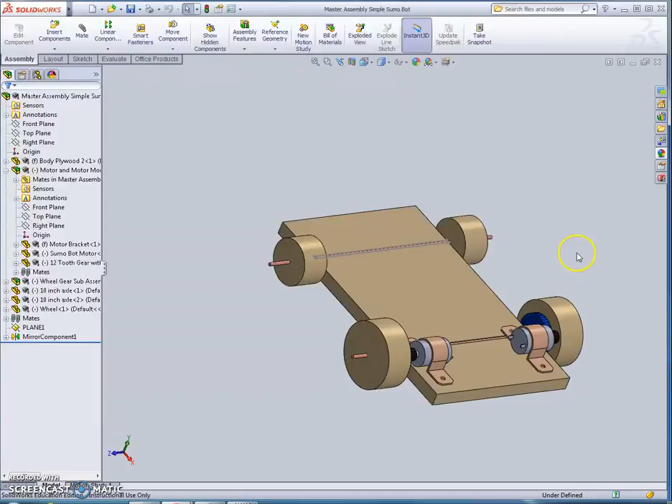Welcome to the SumoBot tutorial number 4. In this tutorial, I'm going to be showing you how to use SolidWorks to make more complex gear trains than I had in tutorial number 3. In the case of tutorial number 3, I showed you a gear train where there was a gear attached directly to a motor that was driving a gear attached directly to a wheel.

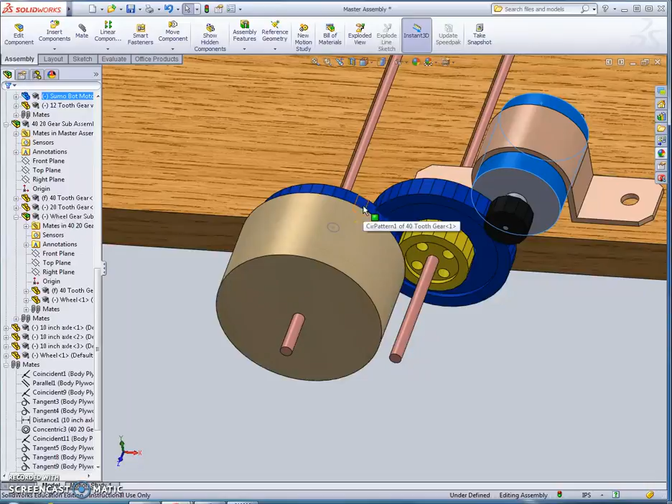In this tutorial, I'm going to be showing you how to create an assembly that has a gear train that looks something like this, where it has an intermediate gear stage. So the black gear is driving the blue gear, the blue and yellow are connected together, the yellow is driving the blue gear that's attached to the wheel. The reason that it's going to be helpful and important for us to use SolidWorks to design this gear train is the spacing between this axle and that axle is crucially important.

If this axle is moved to the left, let's say about 1/16 of an inch, these gears will be too far away from each other and the teeth of the gears will literally miss each other. They won't be aligned to touch and the motor won't be able to make the wheels move. If, on the other hand, this axle is placed to the right too close by about 1/16 of an inch, the gears will be jammed up against each other and they will grind and not really be able to move.

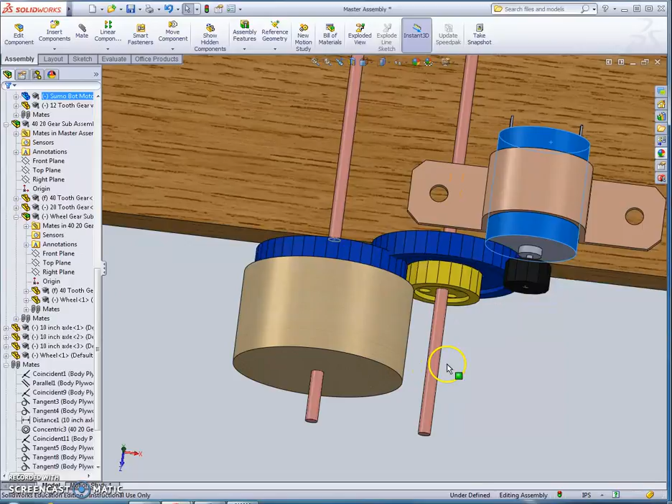So the precise placement and distance between these two axles is crucial, and that's what I'm going to be showing you how to use SolidWorks and the assembly feature in SolidWorks to do. All right, we're going to go back to our master assembly for our simple SumoBot. I'm going to delete a few of the last steps that we did. And actually first I'm going to save this as a new file. I'm going to call this master assembly 2 complex sumo.

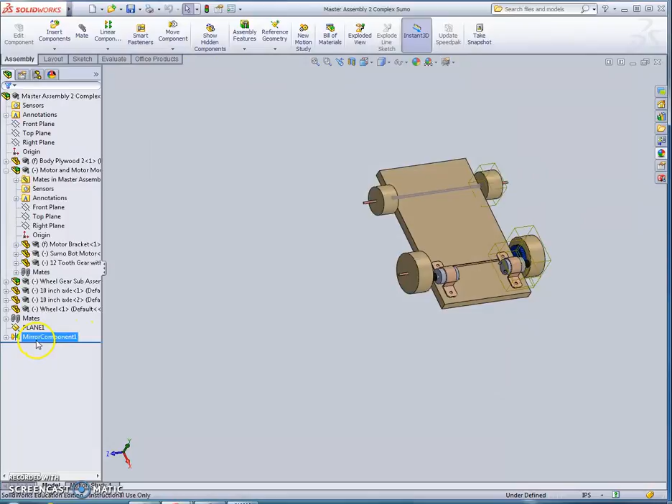Okay, here we go. I'm going to delete some of the last steps. I'm going to delete the mirror component and the plane that we created. And I'm also going to select this wheel and gear subassembly, and I'm going to delete that from our assembly. There we go. So we're kind of starting over with part of the gear train. Let's go back to Insert Components. We're going to find the gear train subassembly that we created earlier. This is in tutorial number 2. I'm going to place that there.

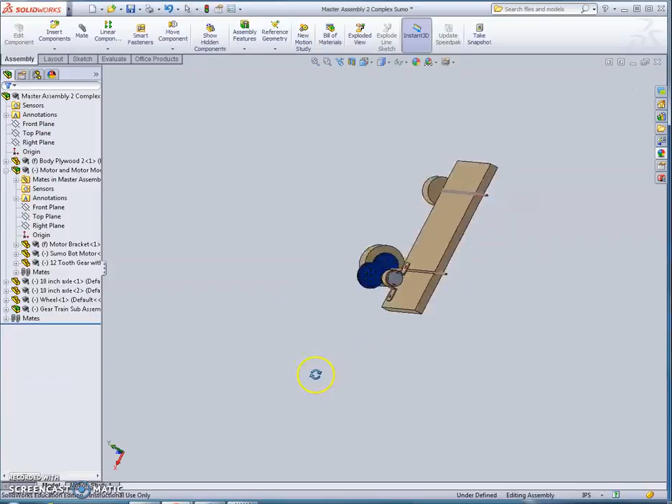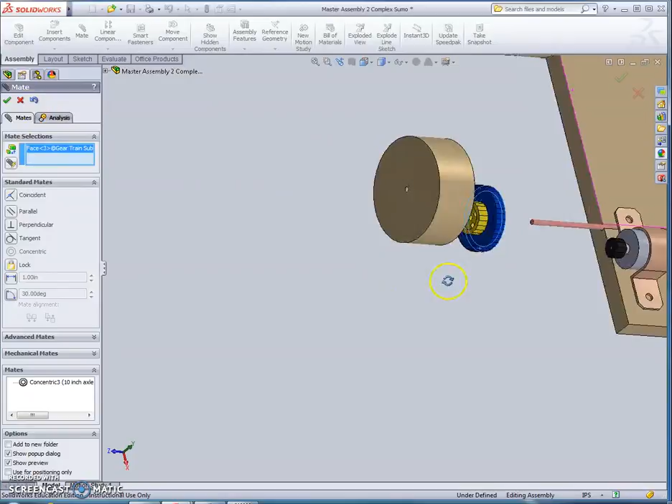And the first thing we're going to do is mate this gear with that axle. So to do that, we're going to select the inside cylinder. We've done this before. Select the cylinder on that axle. Check mark. Then let's also line this up with the face. So that and that. And I'm going to space them out by about 1/8 of an inch, so it's not quite rubbing, but it's very close.

One thing that I did intentionally: you'll notice that this wheel is actually too large to fit where this axle is going to go. That's something that, if there's time at the end of the video, I'll show you how to change. But actually, let's change that right now. If we select that part and edit component, we can go back to the original component and make changes in it. So that part itself is highlighted here. It was called the 2.5-inch wheel. I just click the plus so we can see all the different steps that were made.

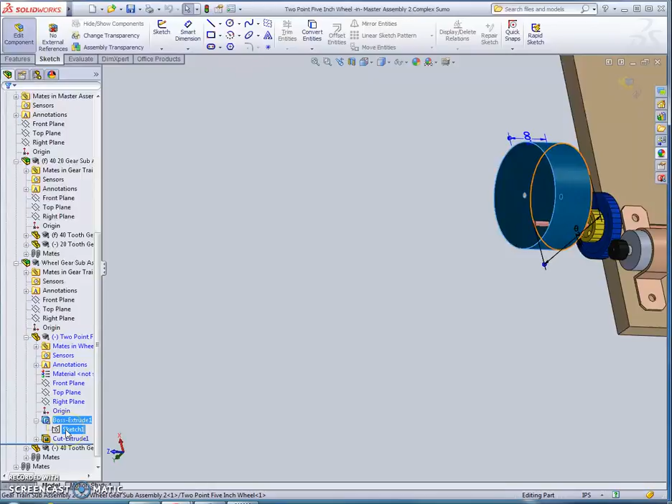That circle, to make that smaller, I need to change the sketch. So click plus next to boss extrude. Click the icon for the sketch and then edit sketch. And then you see where it says 2.5 inches there. I'm going to change that to 1.5 inches. How about 1.75 inches instead? Check mark.

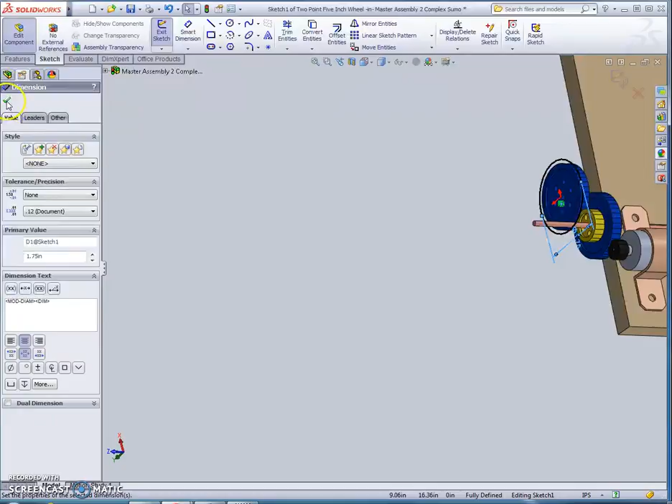Exit sketch. I'm done editing the component, and you can see that in our assembly I made changes to that wheel. That wheel is now also changed in its original part file.

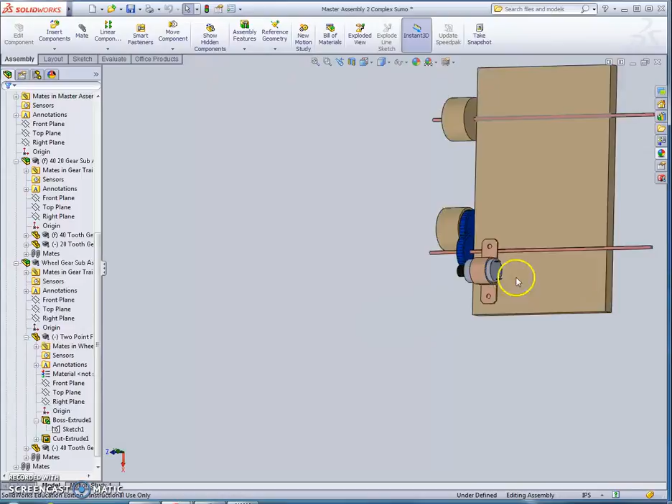Okay, so the next thing that I'm going to show you how to do: we've already created one dado cut, and the placement of that dado cut was not very important because we can really just move this motor around to make it mesh with that gear. Kind of in real life, that's how you'll physically do it. The dado cuts, however, are things that once you cut them, you can't move, and so they need to be placed precisely. And so here's how we're going to use SolidWorks to do that.

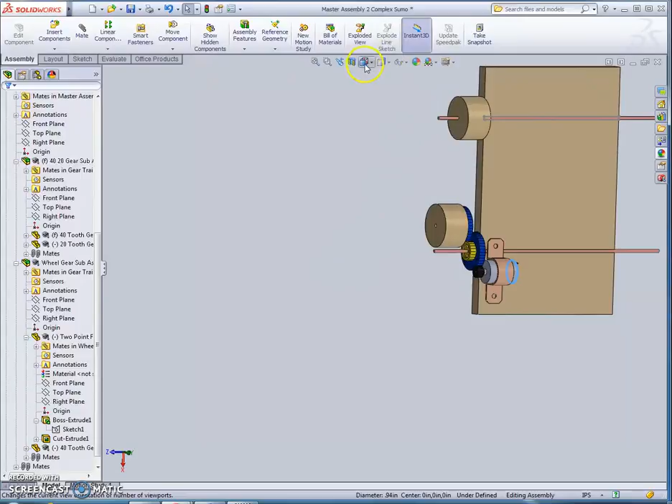I'm going to first look from the side view, try to be lining things up this way, and that wheel is really going to be in the way of what I'm doing. So I'm going to click on the wheel, then go over to where it is in the Feature Manager design tree, and I'm going to click Hide Components. So it's going to look like it's not there, it's invisible. I can make that come back if I want again.

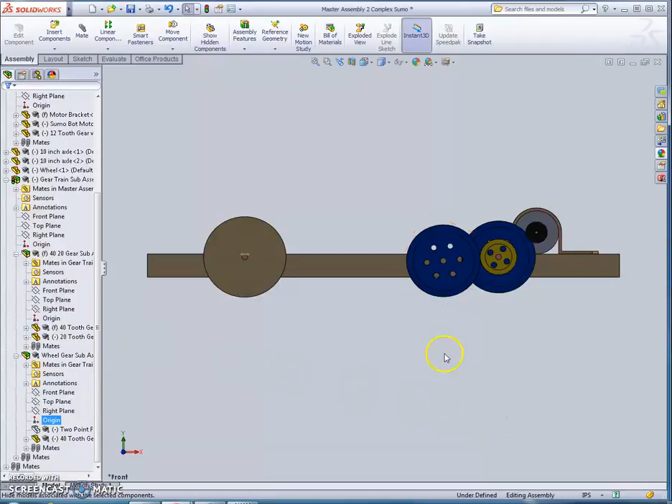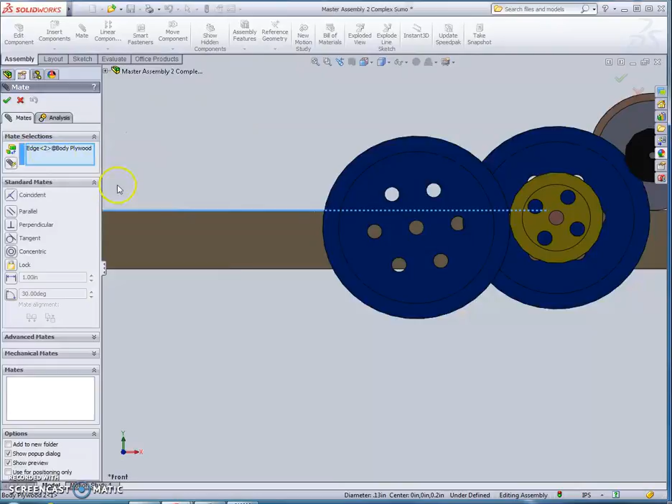Okay, next, I'm going to mate this gear to the top of this plane. And so here's the idea. The dado cut that we're going to be cutting is going to be on the top of that board. And so we want this circle, there we go, to be lined up with that edge. All right, and it's having trouble with that. Instead of the edge of the circle, let me do the cylinder part of the circle. And I'm going to line it up with the top face.

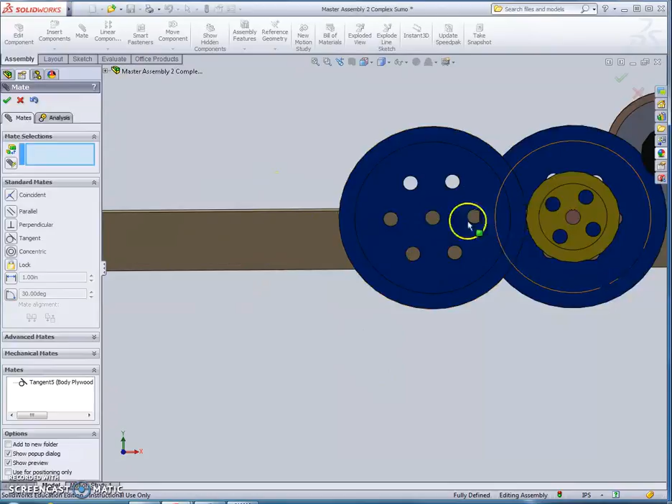There we go. So it didn't like lining the edges up, but when we line those faces up, we're basically saying that those faces, which are planes, are going to be tangent to each other. And there we go. So as we did that, you'll notice it rotated our gear assembly.

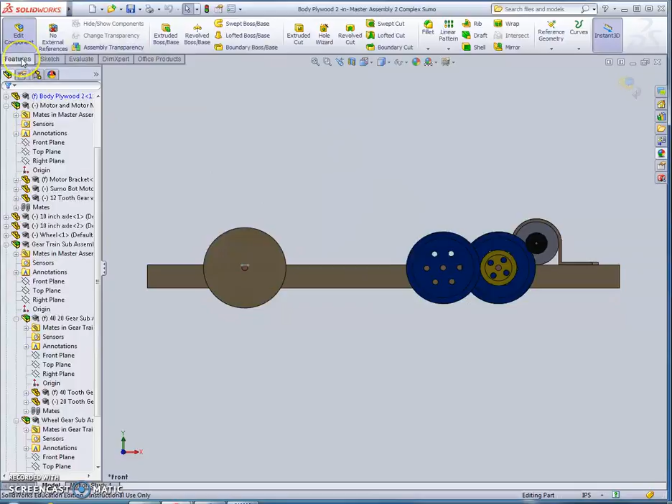Okay, the next thing that we're going to do is we're going to make a dado cut in this piece of wood that's lined up with that circle. So again, I'm going to go back to the side view. I'm going to select the plywood. I'm going to click Edit Component. And then now that I'm in Edit Component, I could sketch on the plywood, or I can go back to Features, and I can do things like I normally would do with a part.

In this case, I'm going to do an extrude cut. It asks which face I want to cut. I'm going to cut on this face. And then I need to draw a sketch. It just moved over to the sketch toolbar. Now, here's why this is helpful. We have this circle that's here, and I'm going to try to draw a rectangle that is centered around, or a square that's centered around this circle.

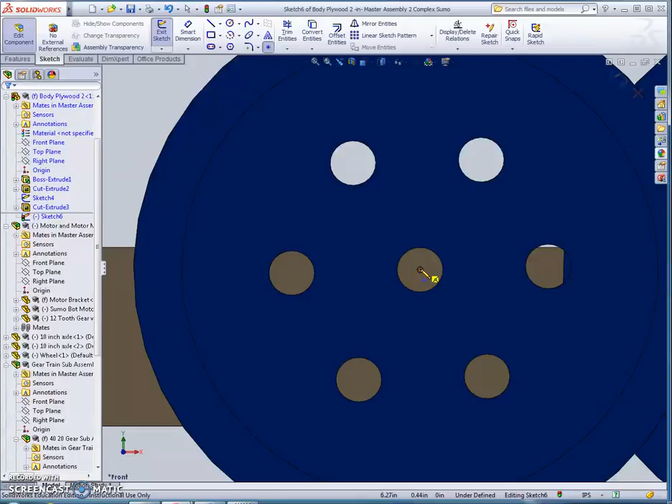To do that, I'm going to start by sketching a point. That's the point. And I'm going to hover until I can make sure that this point is concentric with, or in the same place as the center of the circle that's already there. So if I click on point there, it placed a point that was in the same location as that.

Okay, next, I'm going to draw a rectangle. The exact dimensions of it don't matter right now. I'm just going to place it there, and I'm going to use the Smart Dimension tool to make it 1/8 of an inch wide and 1/8 of an inch tall. And you'll notice this is not centered on that point.

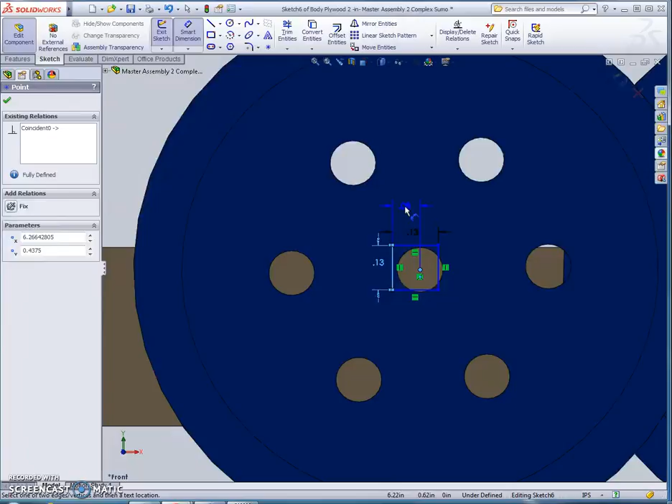Now you might think that you can try to center it by using the Smart Dimension tool and then clicking on that point. Oh, perfect. And that actually works great. I tried that a few minutes ago and it didn't work for me. But so from edge to that point, and then for this to be lined up right, I want that point to be in the middle of the rectangle, or rather the square to be moved over so that it's in the middle.

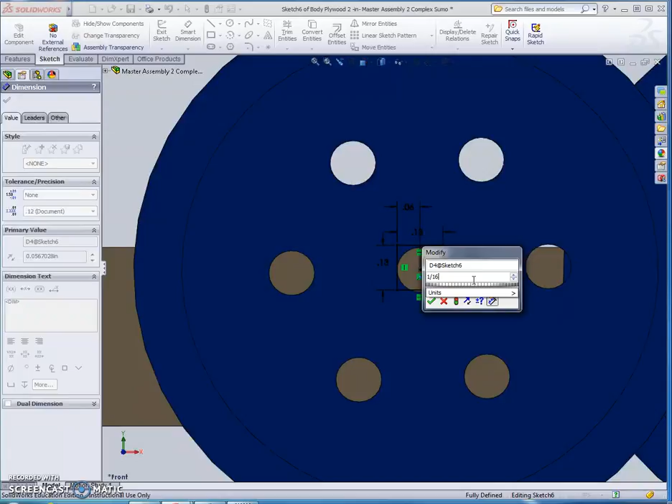And that means the point will need to be a 1/16 of an inch from the edge, 1/2 of an eighth. There we go. So that moved it over horizontally. I'm going to do the same thing by selecting the point and then selecting the rectangle and then making it a 1/16 of an inch vertically. Click check mark, exit sketch.

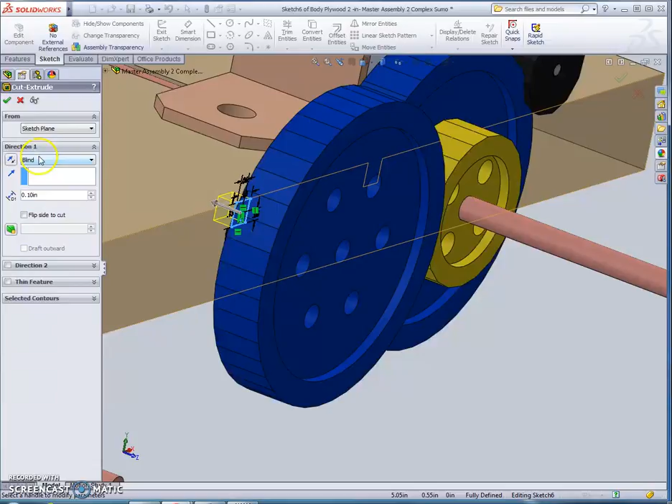Now it kind of looks like I sketched on the gear, but if I rotate this, you'll see that the actual sketch that I made was actually on that plane, the plane of the block, the plane that I selected originally. I could do a blind cut if I want. I'm just going to select through all, and it's going to make that cut go through that whole block of wood. Okay, check mark. There we go. All right, now we have the location of our next dado cut.

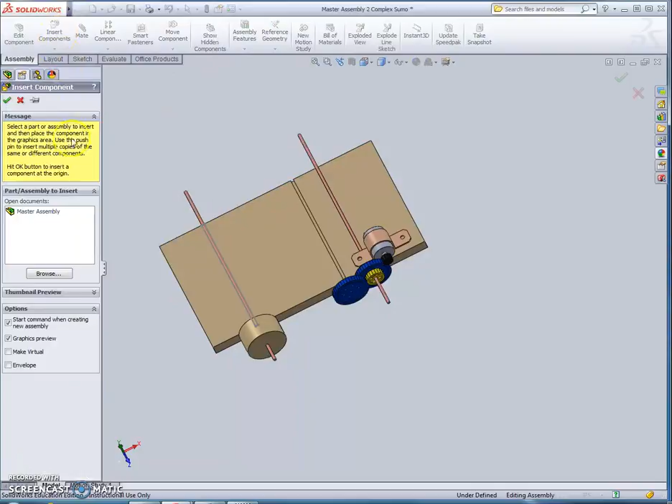I am going to now insert. I'm going to be done with editing components. I'm going to insert another axle. Here is our 10-inch axle. This part I'm going to go through somewhat quickly since we've done a number of things like this before already. Select the face of the cylinder. Select the bottom face there. Look at it from the side. Yep, that's lined up how I want.

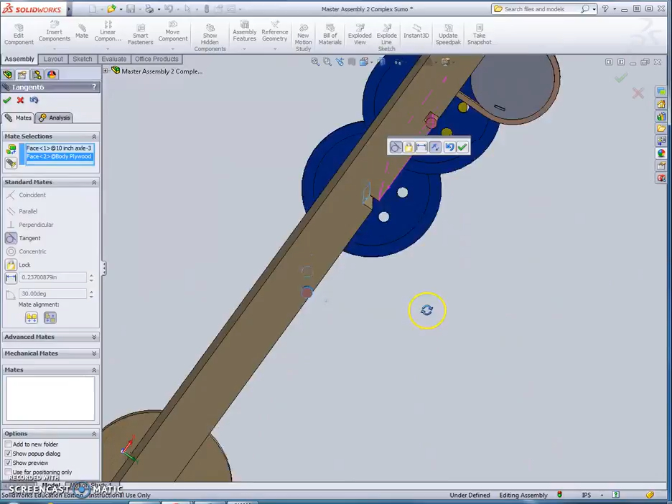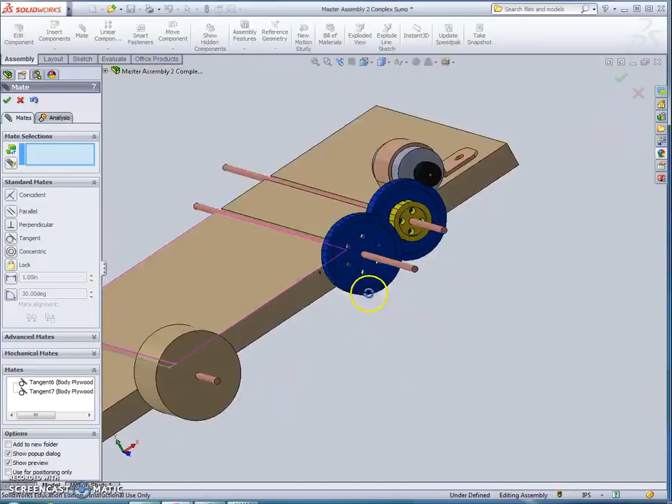I'm going to select the face of the cylinder again. Select either of those sides. That's not lined up how I want, so I'm going to click the Flip Mate button. Look again from the side. That looks great. All right. Now this gear is now lined up with that axle, but if you remember, think back to how I put this here. Actually, yeah, it is fixed. I was thinking that might be able to rotate. It is fixed in space, so I don't have to do anything with that.

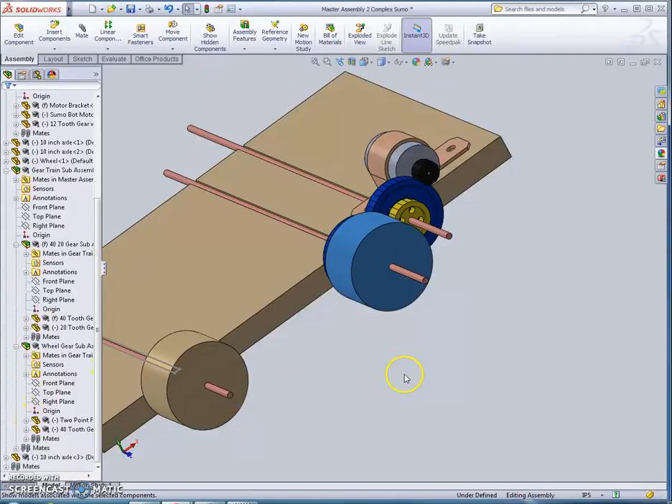Okay, the wheel that we kind of made go away, we're going to make it show up again. We have to find where that was. Here it is. You can see the icon is clear. We're going to show component. There we go. Now our gear train's done. Let's go through the steps of mirroring this real quick. I also realized I forgot to center this axle. I'm going to do that. Offset distance of 2 inches.

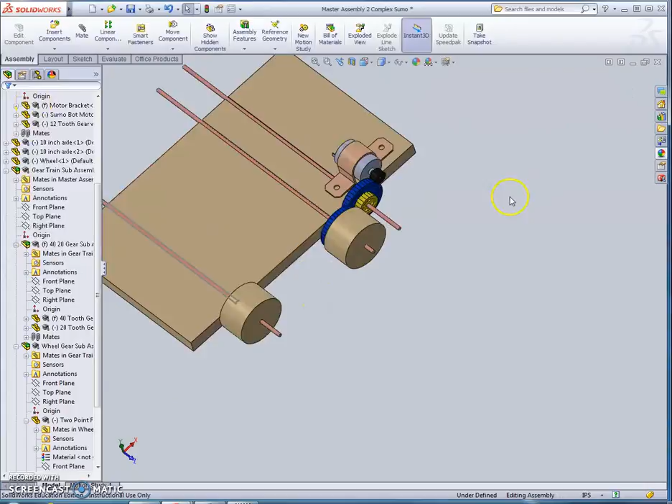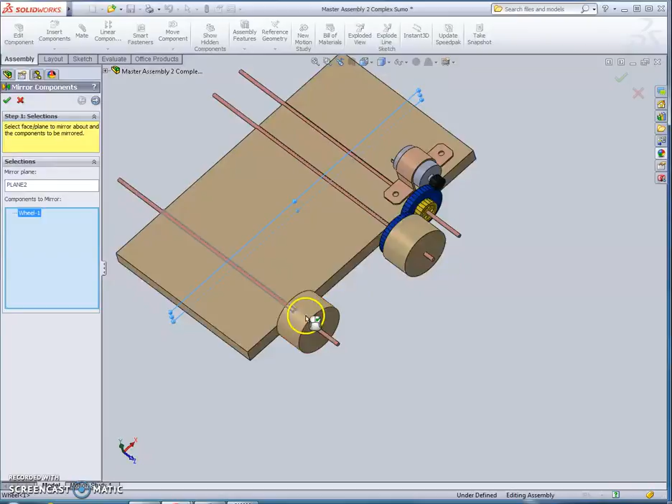Good. Let's go through the mirroring step. We're going to create reference geometry. We're going to create a plane. We want it to be parallel to this plane, but 3 inches towards the middle. Good. Now we can mirror components. It's already selected the plane that we want. We're going to mirror that, that. Check mark. Hit save all. All right, and then you can see there is our completed assembly.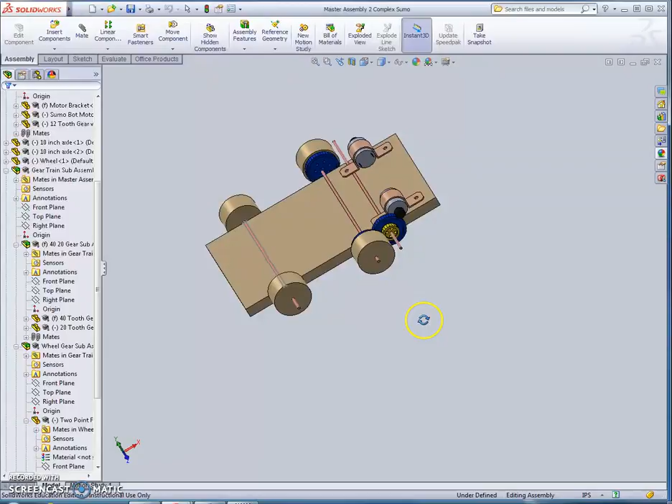Okay, a couple notes also just to end this. I decided to set up my gear train. Oh, did not copy these gears. Let's figure out why that happened. Well, oh man, and those things didn't even line up. Oh, it did. Goodness. All right, just to finish this off, it looks like since I didn't mate these, I'm going to edit. Oh gosh, can't undo. All right. I'm going to try to delete those last couple steps and see if we can fix that. Mirror component, delete.

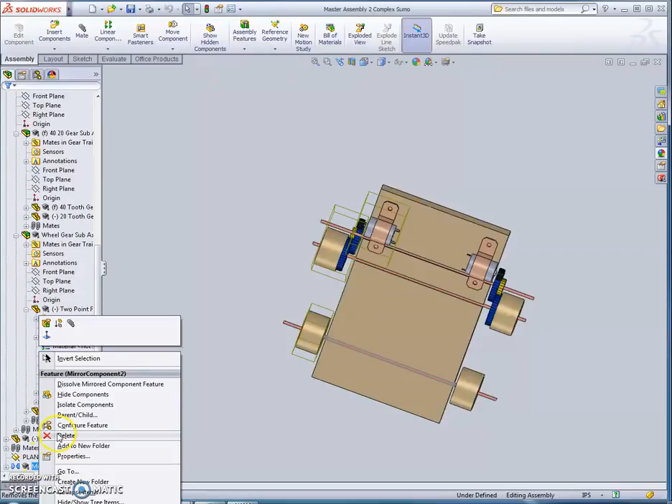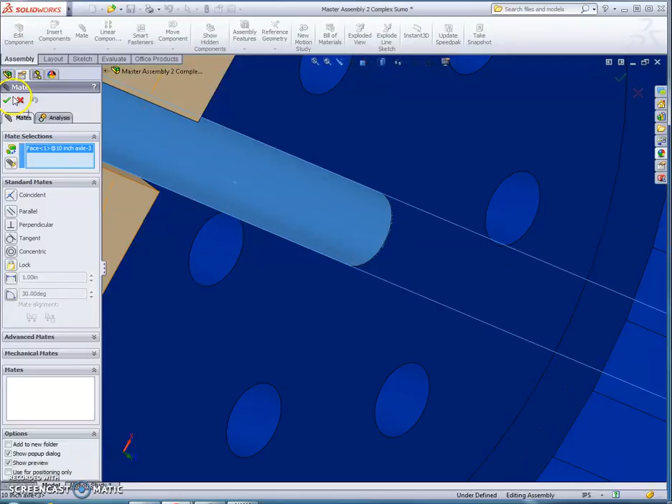Let's go back. I think the issue that I have here is I have a few things that aren't mated that could be. So I'm going to mate that cylinder. All right, well, I'm not going to be able to solve this very quickly, but at least this side is lined up the way that we want it.

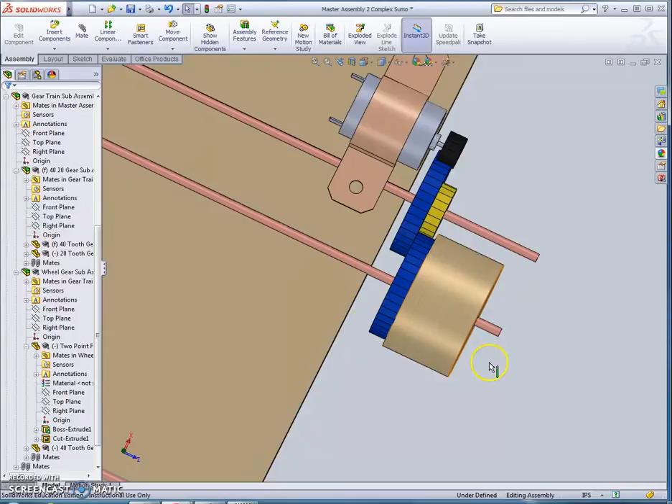I think what I should have done before I did the flipping thing was mating the inside cylinder of this gear to the axle before I did the reference geometry and flip that. At least this side is lined up the way we want. These dado cuts are lined up in such a way that these gears are going to mesh just like they're supposed to.